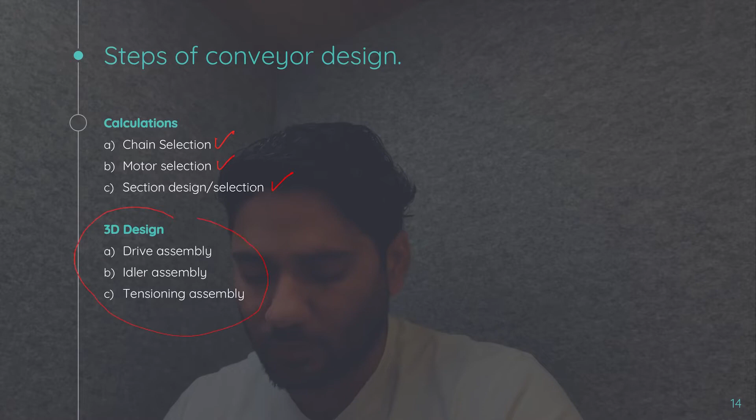Let's start with the chain selection. For chain selection we'll need the following things: what is the weight of the pallet, what is the weight of the workpiece, and what are the pallet dimensions like length, width and height.

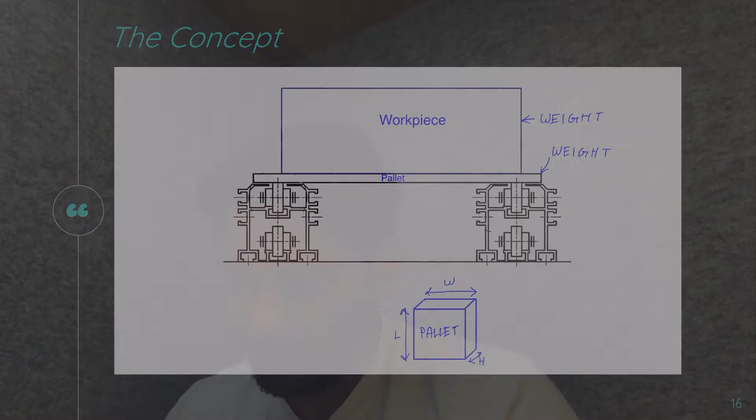Another thing we'll need is the length of the conveying portion and the weight on the conveying portion, the length of the accumulation portion, and how much weight is on the accumulation portion.

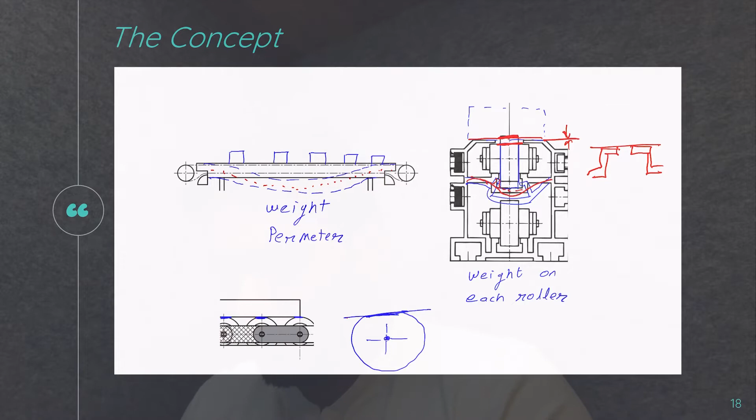Another important thing: when there is a plastic roller instead of a steel roller, excessive weight can result in the flattening of the plastic roller as well. So that is why the pallet weight, the workpiece weight, and the forces exerted onto the pallet are really important, because those will be directly transferred to the accumulation conveyor or the section beneath it.

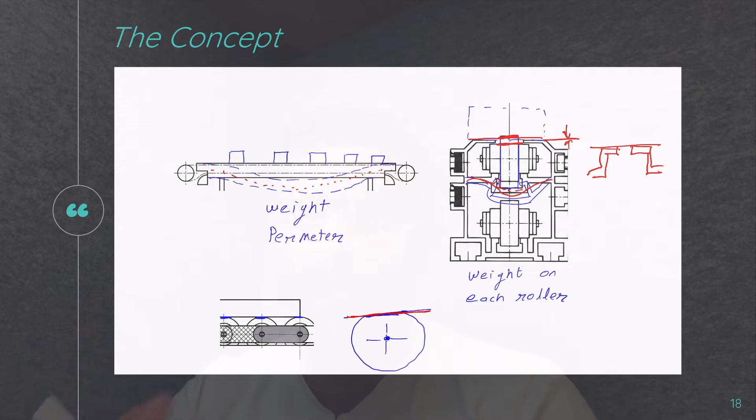What are the prerequisites required in order to calculate? Pallet width, pallet length, pallet height, and what is the payload we are expecting on the pallet. Yes, it is an accumulation conveyor.

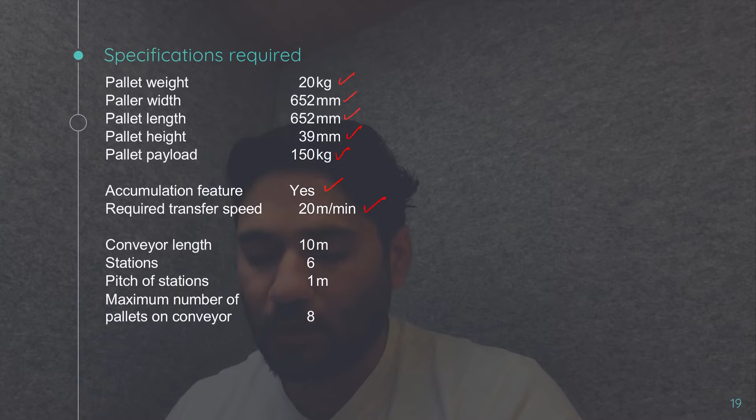20 meters per minute is the required transfer speed. In industry, especially in the automotive industry, the most common speeds used are between 15 meters per minute to 20 meters per minute. Now the conveyor length will be 10 meters, and there will be a total of 6 stations on this conveyor.

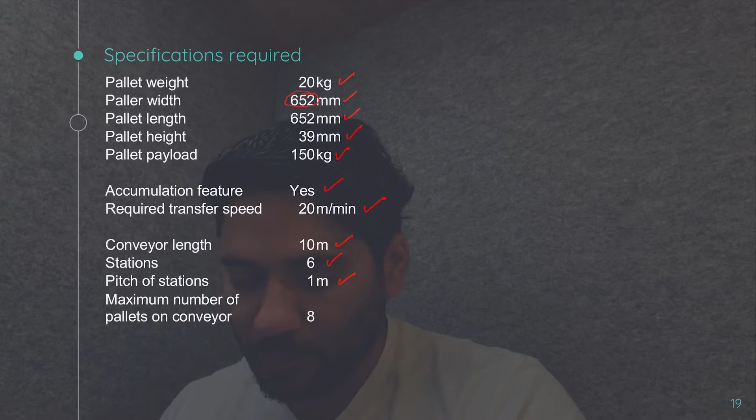The pitch of the station will be 1 meter, as these totally correlate. This is the width and length of the pallet, and the station pitch is 1 meter. The total number of pallets is 8.

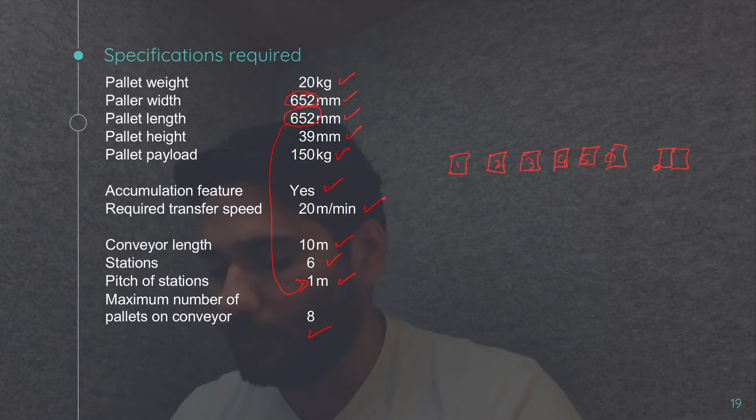That means at a time 6 pallets will be working on a station - 1, 2, 3, 4, 5, 6 - and there will be 2 pallets waiting for their turn. So there will be a total of 8 pallets at a given time on the conveyor. Maximum load per meter on the conveyor - why will this be required?

This will define the weight on the individual roller and on the section. Both should be below the allowable weight limit—weight of pallet and workpiece. This will be required additionally to calculate motor power and tension of the chain.

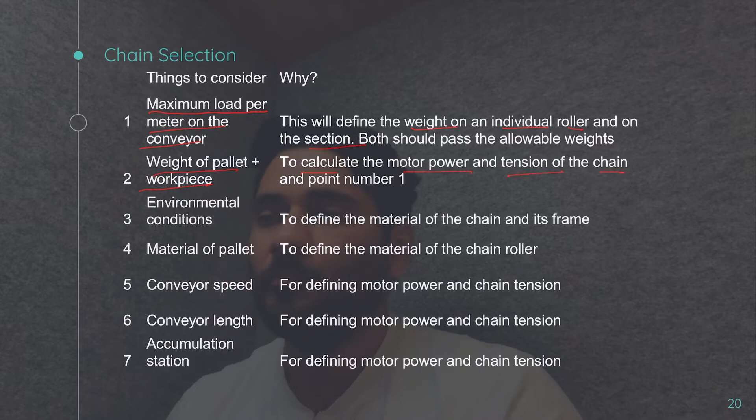Then the environmental condition—this is really important. If you are in a pharmaceutical industry, food industry, or any industry where you need a clean room environment and special lubrications are to be used, you need to be very careful about the rollers and link material you're using. You might have to go for polyurethane roller or nylon roller, or maybe a chain of stainless steel.

So all these things need to be considered before we can jump into selection of material. Then material of pallet—this is important because it will directly impact the roller life. If the pallet is of stainless steel, let's say hardened stainless steel, and underneath you have a plastic roller, then life can be seriously compromised. In such cases, it is recommended to have a steel roller under the steel pallet.

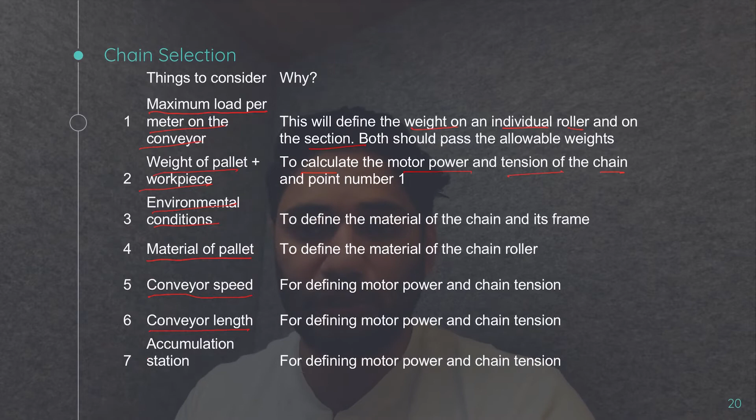Talking about the conveyor speed, this has a direct relation with the motor power selection. And then conveyor length, again, it is required for tension, chain tension, and hence the motor power calculation. Then accumulation stations, again same thing—checking the allowable roller load.

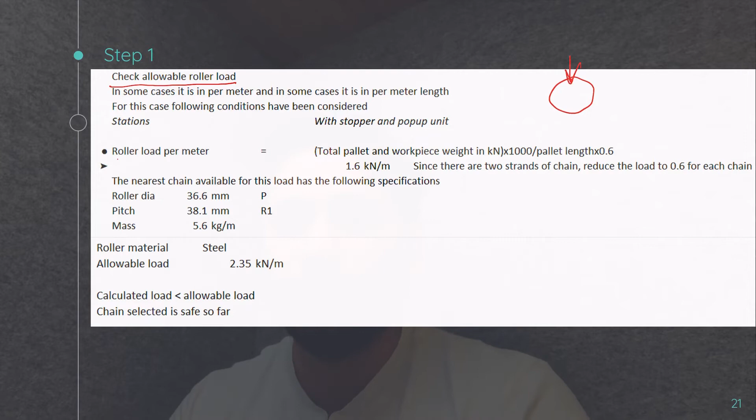So how much load on a particular roller will be exerted when there is a total weight, or the maximum weight, on the conveyor. So in this case, roller load per meter can be calculated by total pallets and workpiece weight in kilonewton—this is total pallet weight, not the number of pallets—plus workpiece weight in kilonewton, into 1000, divided by pallet length.

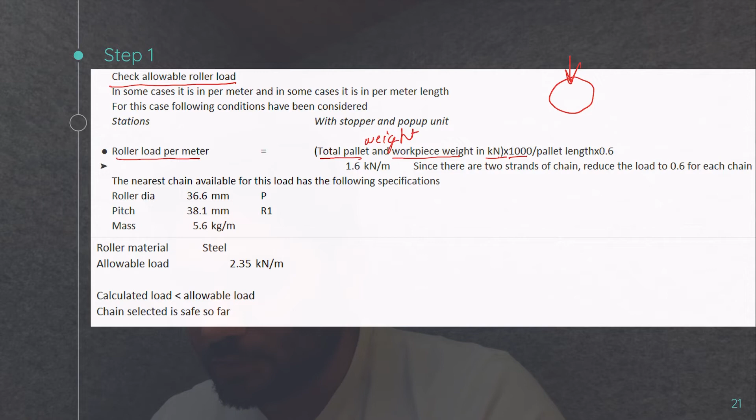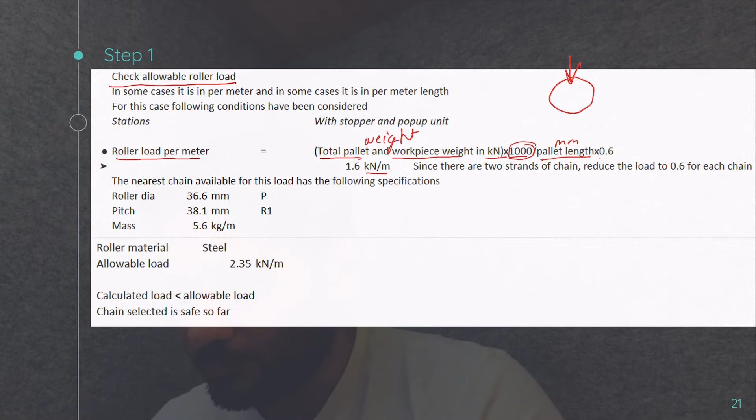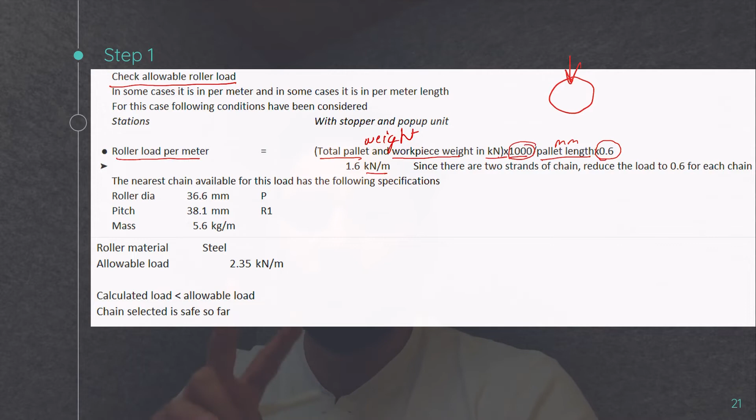Now why have I multiplied by 1000? Because pallet length is in mm and the desired result is in kilonewton per meter. And then there's a very peculiar thing I multiplied by: 0.6. Why 0.6? Because it is very difficult to have 50-50 weight distribution on both strands of the chain. This is the pallet, this is one roller, this is another roller.

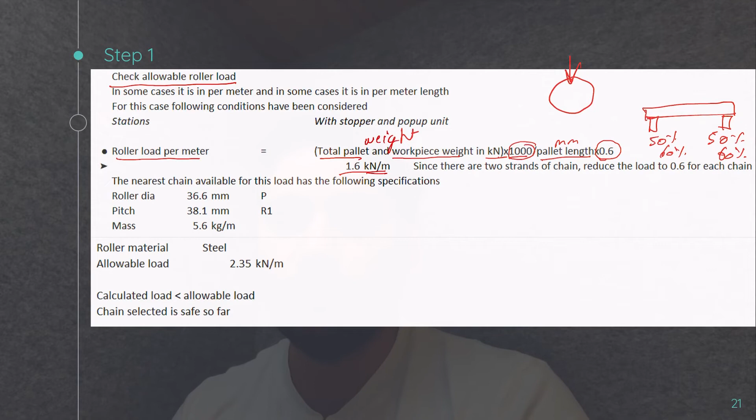So it is almost impossible to have 50-50% distribution. A good guess is to take 60% on each roller, so that we have a conservative and more realistic approach. So from here we calculated, based on our previous assumptions, 1.6 kilonewton per meter is the exerted weight on the rollers. Based on this, we have done a chain selection, which has a roller diameter of 36.6 millimeter

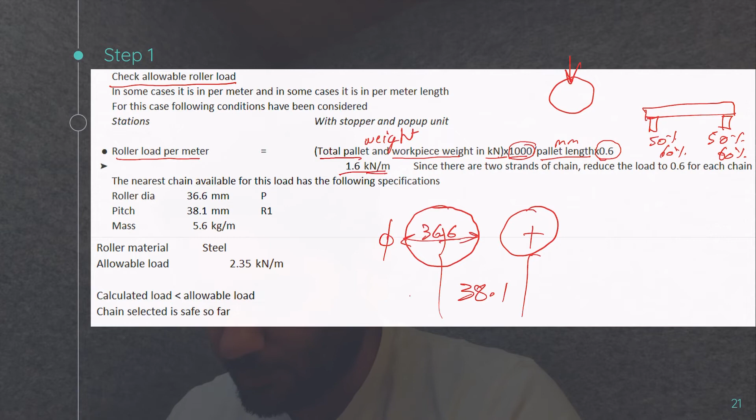and the pitch of chain is 38.1 millimeter. And the mass of chain, which is required for further calculation, is 5.6 kg per meter. Roller material we have selected is steel, and the allowable load for this particular chain is 2.35 kilonewton per meter.

There are different suppliers who provide accumulation chain. You can get all this information from their catalog.

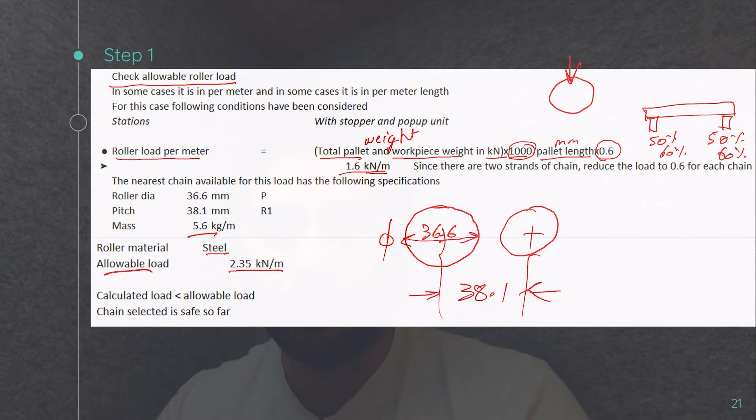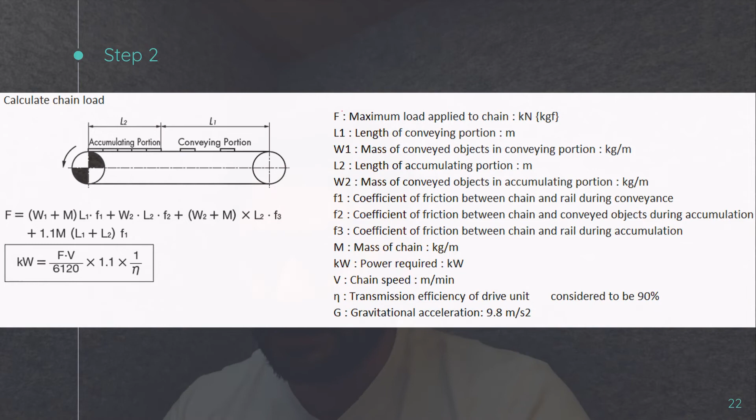Next, we'll be calculating the chain tension, which is really important for calculating the motor load. So let's start with what we'll be needing. We'll be calculating the maximum load applied on the chain, which will be calculated by length of the conveying section, weight on the conveying section, length of the accumulation section, and weight of the accumulation section. Then we have three coefficients of friction factors, and then mass of the chain, which I mentioned in the earlier slide.

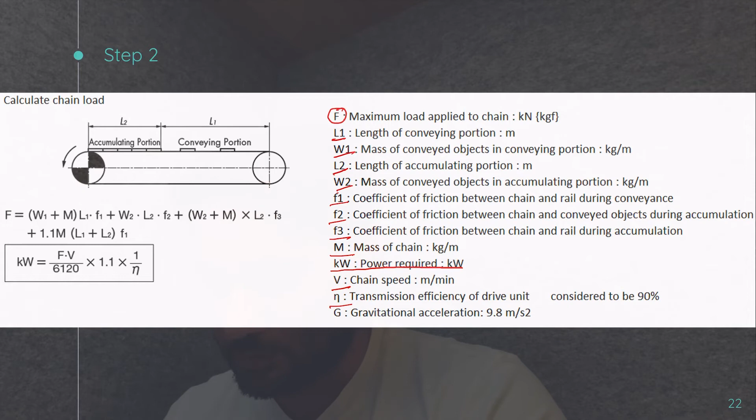So from this we'll be able to calculate the motor power. For that we'll be needing the speed of the transfer, efficiency of the transfer, and the gravitational factor. So with this formula, we put in our values, and these are the values which we initially assumed, and got this result: 200.48 kg, or 1.96 kilonewton.

Selection of chain where allowable load is 3.73 and our load is 3.3 kilonewton. So it's a good selection.

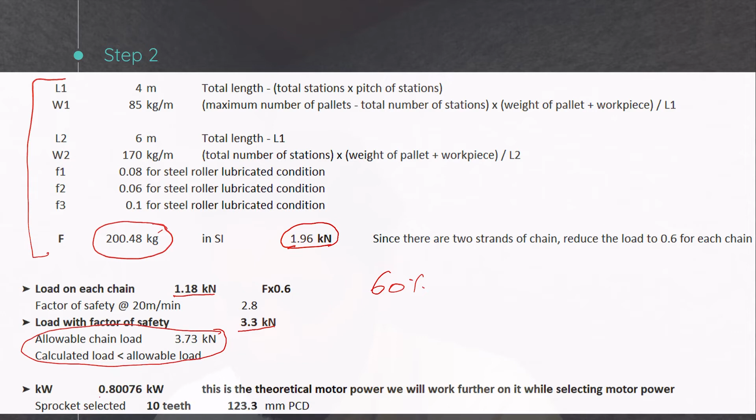Now coming to the motor power. In this particular case it comes out to be 0.8 kilowatt. From the previous slide, we saw the kilowatt can also be calculated by this formula. So we just put our values in this and we got this motor power.

What should be the pitch of legs? Let's say you have a 10 meter long conveyor. So what should be the pitch of legs? A very good approach is to know the moment of inertia of the section and just apply the beam formula. I've consolidated that here, assuming there is 2 mm slack in the section.

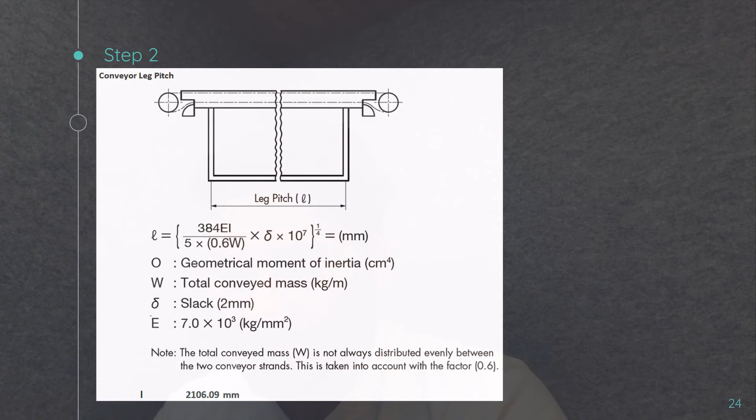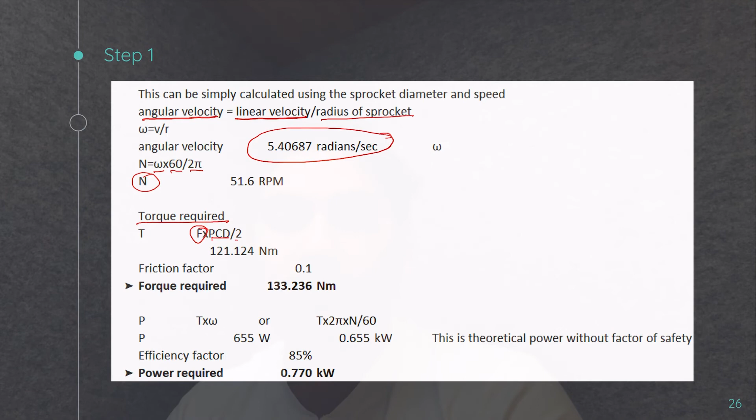Now for torque required, it is simply the tension pull on the chain multiplied by the PCD, because it is a diameter, we'll be dividing it by 2, and we get the resulting 121 Newton meter torque.

Next is the friction factor. Obviously there will be some losses. As a rule of thumb, I take it as 0.1 because there are alignment issues and friction issues. If you dig deeper into the friction factor, it might come out to be 0.08 or 0.05, but there are some misalignments as well in the conveyor or installation inefficiency, so it is better to keep it 0.1. This is just based on experience. Then torque required becomes 133 Newton meter.

Now calculating the motor power is simply torque multiplied by the angular velocity, that is T times 2 pi n by 60, or you can multiply directly by omega. We get...

0.65. There is a motor efficiency factor because it will be a helical gear drive and there will be some motor efficiency. The total efficiency of the entire package is 85%. This 85% I have got from the manufacturer's catalog, and the motor power is coming out to be 0.77 kilowatt.

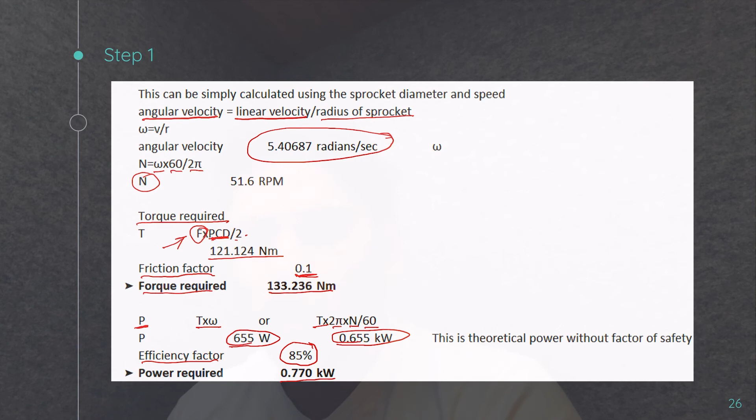Now we'll be adding the load factor to this particular case, which is 1.35 for moderate shocks and 24 hour operation. We are assuming that in an assembly line there is a 3-shift operation and the conveyor will be running 24 hours. So we are selecting a gearbox with a service factor greater than 1.35.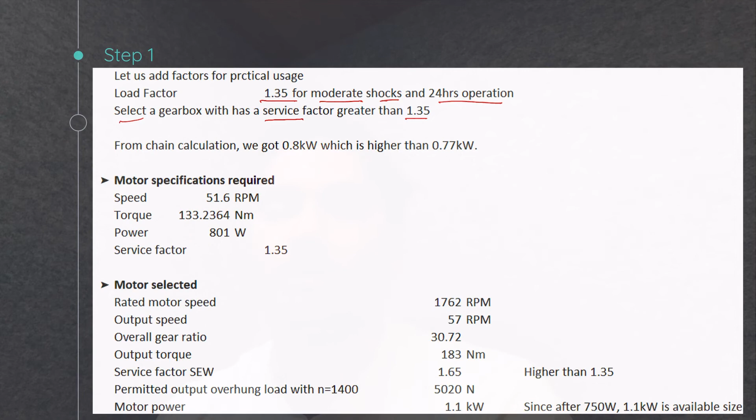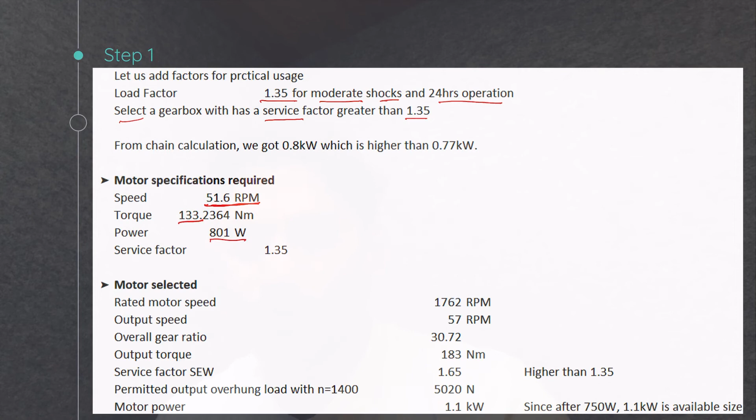Motor specification for this particular case: 51.6 RPM, 133 Newton meter torque is required, power is 800 watt, and service factor is 1.35.

We have step sizes of motors, like first we have 100 watt, then 200 watt, 400 watt motor, likewise 750 watt motor. After that we directly have 1.1 kilowatt motor. Because our motor power is 800 watt, we cannot deploy the 750 watt motor, so we'll have to jump up to the 1.1 kilowatt motor. The motor which we selected has a motor RPM of 1762.

After reduction, the output RPM on the motor shaft is 57 RPM, giving us the overall gear ratio. This motor can provide up to 183 Newton meter torque, and the service factor is 1.65. The permissible output overhang load is 5020 Newton, and the motor power is 1.1 kilowatt.

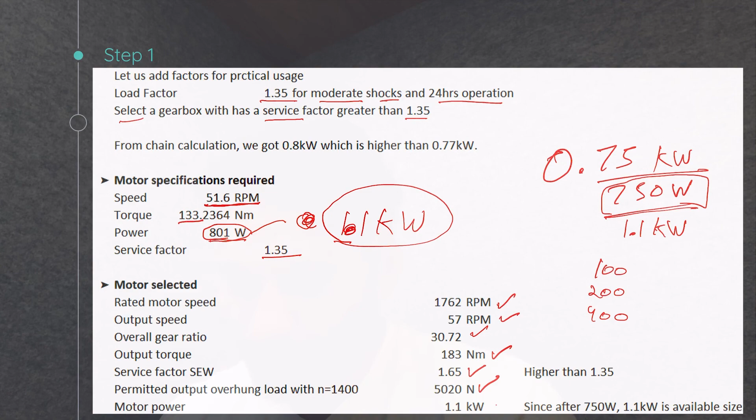In the next chapter, we'll be discussing the 3D modeling and construction of the accumulation conveyor. Thank you.